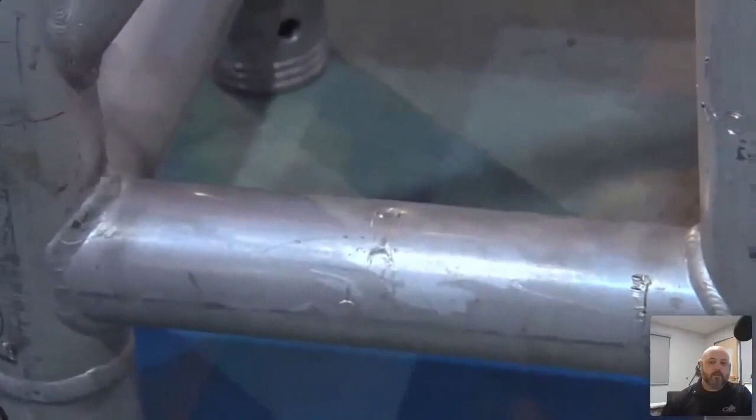And then the last one, I didn't see too many people answer this one, so this one must have been pretty hard. Maybe it's the camera angle, but there's a C-clamp mark that's pretty indented there on the bottom chord. It might be you haven't got the right light on it to make it noticeable, but those were kind of the 3 different indications of what we would need to retire that. Now, Brian, how would you measure something like that?

Well, if you're looking to find out what the tolerance is, like how much of a dent or gouge you can have in a truss, you're not going to find that information in the standards. The standards remain pretty vague, so they don't call out specific manufacturer information. But I would contact the manufacturer of that truss and ask them for those values, like how much material can be worn away, or how deep of a gouge can I allow in there.

And when it comes to some components of the truss, like the ladder bars and maybe the diagonals, some manufacturers actually do make it to where those can be repaired. You send the truss in, they remove it, they put a new one in, and you're good to go. And that's going to be a decision about how much it costs to ship it, get it repaired and all that versus the cost of a new section. But what you don't want to do is continue using truss that you suspect is damaged. Mm-hmm. Very good.

Now, Jesse just joined those trusses together, and we're looking at the bolts there. You got those tightened up. Some of the other things that we should be looking for here are some kind of evidence of inspection, right? Just like our electric chain hoists, the truss has to be inspected on a periodic basis. So Jesse performs his frequent inspection as he's laying it out, putting it together, and we're looking for evidence of a periodic inspection by a responsible party as well to make sure that that truss has been deemed safe to use by a qualified person.

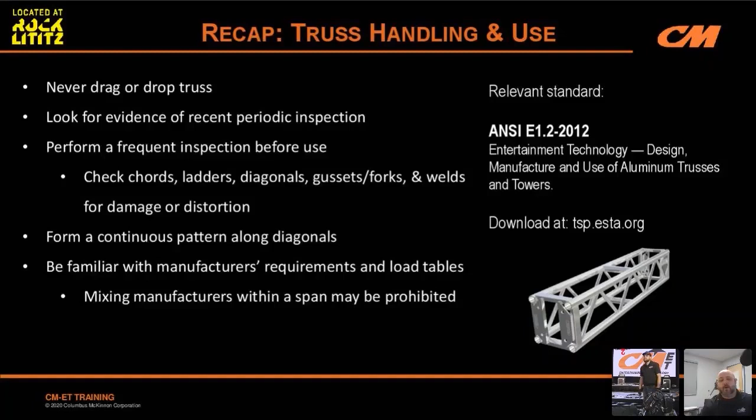Make sure your diagonals form a continuous pattern, and make sure you're also familiar with the manufacturer's requirements and the load tables associated with what you're doing. If you got to mix manufacturers, it's not recommended, and it could be prohibited depending on your employer or the manufacturer. But also realize that you're going to have to use the lesser of any load tables provided for that type of truss.

All right, Nick. So we're going to be getting into the next section here. Yeah, absolutely. So, Mike, if you want to roll the next trivia question, and again, everyone, just go ahead and chime in on the chat board there what we think the right answer is going to be. This is going to be surrounding pre-operational checks of our hoist. So I'll be watching the chat board here, and you guys just start responding when you get the right answer. Brian, if you want to read the question to him while we got time, go ahead.

Which symbol must be embossed on the load chain to verify that it's manufactured by CM and approved for use in the hoist? Now, for our folks that are outside the U.S., they might not see the correct answer on here as it applies to them. So we will talk about that while the question's going. In the EN 818 standard, there are different requirements for the way load chain is manufactured for hoists. And so that certification process is going to be different.

And that hoist will be labeled with an H. It'll be like a cursive, fancy looking H with the number 22. The H signifies that it was certified by BG Prüfzert, a German certification body in Europe. And the 22 is the number that they assigned to Columbus McKinnon. But here in the States, we have a different requirement for our chain, and we've been doing it since 1967.

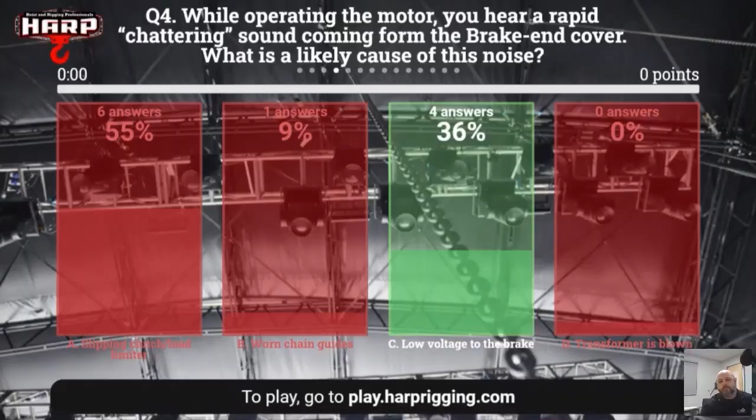Okay, very good. Well, it looks like we're ready to move on to our next phase, which is the pre-operational check of our hoist. Jesse has brought out some of his older hoists that may have a couple of Easter eggs worth of issues for you guys to find. So as Brian is going through with the training portion, if you guys see something that might be wrong, go ahead and call it out, and we'll address it as we see it.

Yeah, before we jump into that, I wanted to talk about a comment I saw come up on the chat. Someone had said motors without gravity switch inverted will chatter also. And the reason I want to bring this up is what that references is the Square D contactor, which is one of the original contactors used in the Lodestar. When the Lodestar was brought from industrial to entertainment, it had this contactor that only allowed you to use the hoist in one direction.

So what I want to tell everybody is that the entertainment standards published by ANSI through ESTA do require that the motor be used motor up and motor down, that you'd be able to use it in either direction. So that would be one of those things I would want to address with any inventory that I have, to make sure that motor complies to those standards if that's your company's policy.

Very good. So our next step is to get Jesse to do this motor pre-operational check. So what are you looking for there, Jesse? What's the first thing that you think you should find? I'm actually looking for any obvious damage to the casing itself, or leakage, dents, anything like that that just stands out. All right. Well, while you're doing that, I'd like for our virtual riggers out there to see if they can find any inconsistencies or red flags that stand out to say, hey, that needs to be fixed or that needs to be looked at.

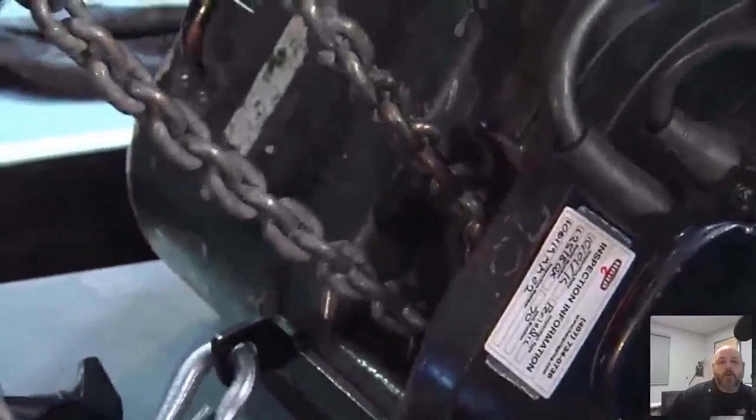Another thing I'd be looking for, Jesse, is to make sure the welds on the chain are facing the right direction. All right, and so for a Lodestar, all the Lodestars, no matter what size they are, if you look along the line of chain, there's a side of each chain that has a weld on it. And those welds need to be facing away from the lift wheel. All right, so away from the dead center of the hoist. When you look at the very center of the hoist and you have the two chains, just go ahead and pull the two chains up so they're parallel. When you look at the center line between those two chains, you want to make sure that the side of the chain links that is facing that center area are the smooth sides of the chains.

All right, they definitely are. Hey Nick, do we have any response from our virtual riggers? Did they find any of the Easter eggs we left for them? Absolutely. I think they found our Easter eggs and a few more. So the one that they found that was pretty prevalent is on the plug. Looks like there might be a loose plug on there, a loose connector. They are correct. Yep.

Yeah, and that's a hint that maybe somebody grabbed that cable to try to move the motor or lift it. And based on the responses we've been getting from our virtual riggers out there, I think that the majority of them know that the cables are not handles. But it does happen from time to time. People do grab onto those. Luckily, this is a quick fix for Jesse. He's going to take off that plug. He's going to take a look at the wiring, make sure nothing got pulled out of its contact. And hopefully he can reseat that cable installation and get it fixed up. Absolutely. So while he's doing that, we'll go over another one.

Looks like a lot of people have said the chain bag hooks need some attention. Can you talk about that? Yep. And I find a lot of people, obviously not the people we have online today, but a lot of people I've worked with don't understand that this is a potential safety hazard for the hoist. We want the hooks on those chain bags to be facing outside. So the nose of the hook, the opening side of the hook, needs to be away from the chain.

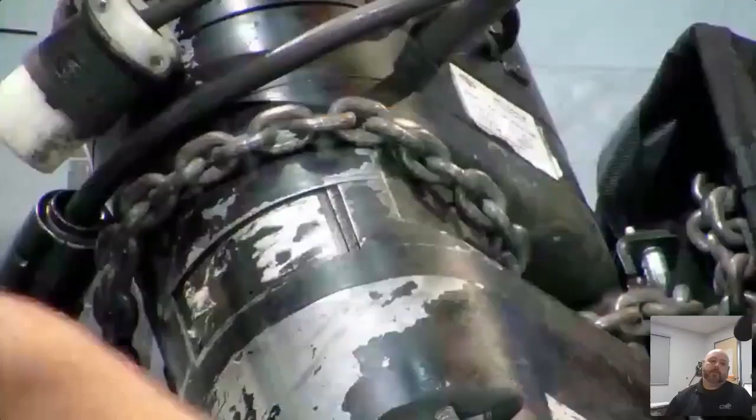So Brian, we got two more. One that's pretty common was they focused on the chain, saying it looked a little rusty, maybe a little dry. If our chain is rusty, how could we possibly remove that rust? Well, if you've got some surface rust on there, that might not be a big deal. You can probably easily remove that. I would start off with a soft medium, like a nylon brush or something like that.

Right. And if that doesn't do it, maybe a wire brush, but be very cautious of it. Don't put the chain up against a wire wheel or anything highly abrasive, because remember, it's case hardened. You don't want to wear away that hardened layer on the outside of the chain. But I think the best way to remove rust from chain that's got rust all over it would be through a tumbler.

And I think the guys at Harp have one of those. Maybe we can take a look at it later. I don't know where it is in your facility, but it's basically a cement mixer without the blade inside. And what we do is we strip the chain of any hardware. We put it in the mixer with walnut shells or various other light abrasive things that aren't going to scratch up the chain. And it does a number on the chain. I mean, it'll take chain like what you're seeing here on screen and make it shiny and new. So it's a fantastic way to clean off chain.

Yeah, very good. If it's pitted, if you've lost actual material of the chain from the rust, that's got to be taken out. The only way to avoid that is to lubricate the chain. You got to lubricate it on a regular basis. And that lubrication, most importantly, needs to be between the links on the chain. Where the metal meets the metal, right?

I see somebody pointed out we're missing our tag. About time. Maybe it was our camera angles that were kind of hiding it. I was surprised not too many people caught that one at first. But now at the nice shot of it, yep, we're missing our ID plate.

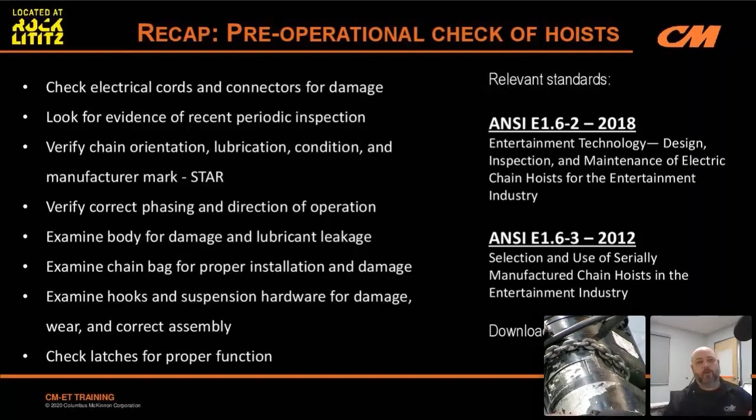So we're going to go over our recap real quick. We'll talk about some of the stuff that we addressed here. The relevant standards for electric chain hoists in the entertainment industry are E1.6-2 as far as inspection and maintenance. And then the selection and use is covered in E1.6-3. So those are your two entertainment standards that you can find on ESTA.org.

And then our pre-operational checklist, kind of a mental checklist that we have to have here, is looking at the electrical cords and connectors for damage. Look for recent evidence of a periodic inspection, right?

A sticker or some kind of label that tells you it was inspected. Look at the chain, make sure that it's lubricated, it's in good condition, and that the manufacturer's mark is there, and also that the welds are facing away from the lift wheel, and that's for Lodestars. For Prostars, different story. Welds face towards the lift wheel on a Prostar.

Verify the right phase and direction of operation. So while I'm reading this through, Jesse, why don't you go ahead and get everything plugged in and make sure that motor runs in each direction as it corresponds to the pickle or controller that you're using.

All right. The reason that's important is when the power phase is reversed on the hoist, when we push up and it moves down instead, what's happening there is the phases have been reversed, but the limit switch inside the hoist is physically still moving. And what that's going to do, if you keep operating it like that for any length of time, you could end up breaking your limit switch right off. In my classroom, in Rock Lititz, we have a handful of broken limit switches and broken travel nuts from the limit switches because of this kind of mistake.

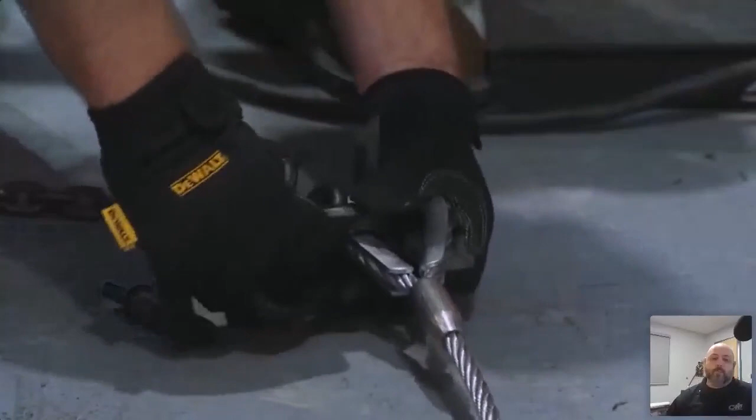And while Jesse's getting that fixed up, I'd like to touch on why it is so critical that the ground rigger is able to keep pace with the uprigger, have a keen awareness of their surroundings, and keep all their operations consistent. The primary job the ground rigger has is maintaining the load hazard zone, the area underneath the work being done above, making sure that no unnecessary personnel are walking through that area, and if they are, that they have proper PPE like hard hats.

They're also there to keep up with the uprigger. The uprigger's got a very important, very difficult job. While it may not be super complex, they need to know what they're expecting to get. Because if I'm up 80 or 100 feet on a beam and I've got to pull all that chain up, that's somewhere in the neighborhood of 120 pounds. And if I pull all that weight up and find out the ground rigger didn't tie the knot right or put the shackle in the wrong place, now I've got to lower it all back down and haul it up again. And I might have a dozen or more points to pull that day. It is not easy work.

So Brian, it looks like our newbie rigger struck a nerve with our virtual riggers with swapping pins. Oh yeah. They don't like that either. No, I can't make these guys happy. See, the problem there, Jesse, is that your working shackle could get caught on the pin there, and that can also get in the way of the uprigger's ability to make those connections. So that shackle needs to be spun 180 degrees.

Fine, guys. Yep. Jesse, how's it feel to play newbie rigger in front of 600 experts?

And also, Jesse, while you're at it, before you make that connection, let's go ahead and turn that eye-to-eye steel around. You see the eye-to-eye steel, the other end of it? Does it have a tag on there? It does. Yeah, so a best practice would be to have that tag where the hook is, so that when the uprigger is going to handle that other piece of steel, they're not having to manipulate that tag, because that tag always ends up getting in the way.

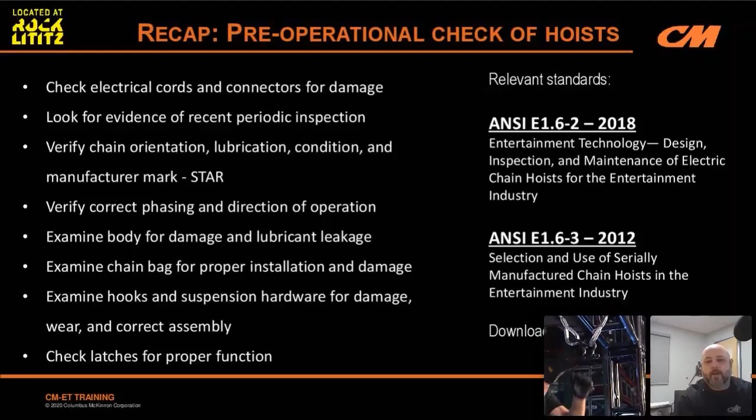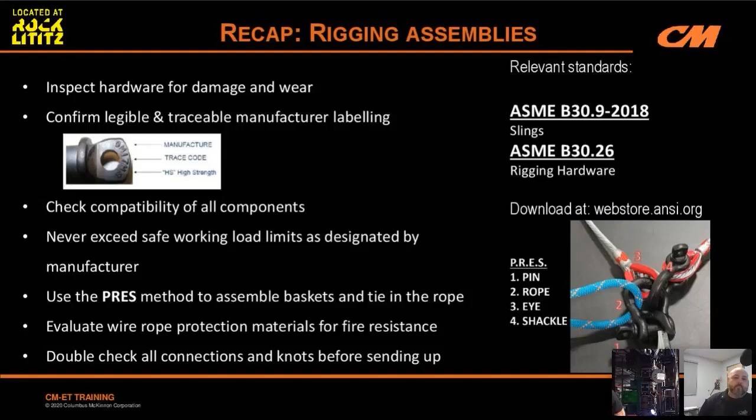Things to keep in mind when we're rigging our points for the top rigger are to inspect all of our hardware. Make sure that there's no damage, no wear. Make sure you understand how to inspect that hardware. And one of those things is to be able to make sure that you can identify the manufacturer. There has to be some kind of permanent fixed labeling on that shackle from the manufacturer, and make sure your pins are matching the body of your shackle.

All right. People do use different manufacturers of shackles, and sometimes the pins and the bodies of the shackles can get mixed up. So if you want to know if your shackle is a proper CM pin, then our manufacturer mark will be on there. It'll say CM. There'll be a trace code, usually a 2-digit or letter code. And then after that, it's going to say HS on it. And HS stands for high strength. That means all of our pins, regardless of the metallurgy of the different shackles we have out there, other than, like, stainless steel, maybe, they're all going to be high strength super alloy pins that are basically interchangeable among CM shackles of the same size.

Check compatibility of your components. We did identify 1/2-inch steel was used with 5/8 shackles. So there's a potential there for the shackles to roll through the eye. So the best practice would be use 3/4-inch shackles or 3/8 steel with 5/8 shackles. Never exceed the safe working load limits as designated by the manufacturer. That is your hard stop. Yeah, we know it takes a lot more to break that object, but you are only allowed to use the working load limit.

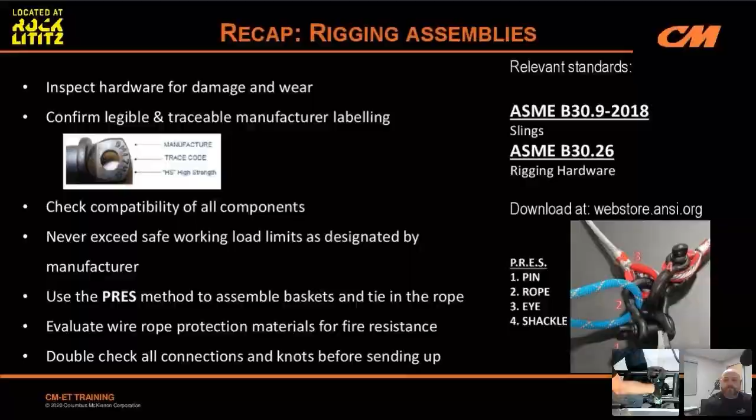All right, we're going to move back to Jesse. He's got some rigging going on there. All right, Jesse, so you're rigging to the truss, and let's see if our virtual riggers can come up with any commentary regarding how you set up your slings.

He's gonna win back your faith. I can see it. And I tell you, let's give him a good opportunity to take a look and find some things, and then we'll go to our trivia. Sure. I think it's good. It'll hold, right? You have Jesse. Jesse's going to win back the love of the team. Yeah, so let's give him a good shot, a good look, and then we'll go to our trivia here. All right. And then we can cut back to it as well.

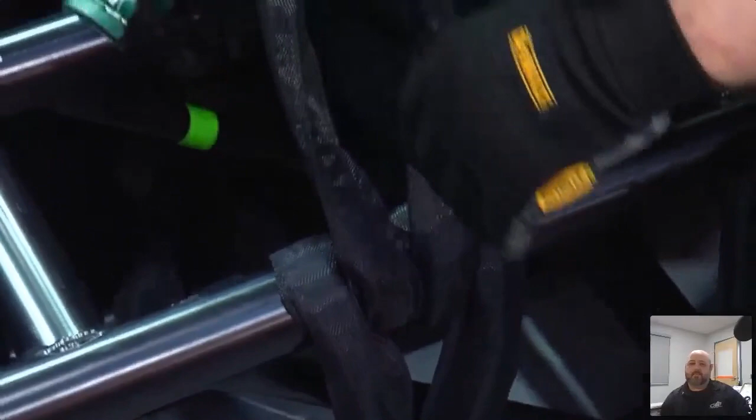Here comes the first question. Which size and configuration of sling would be the most efficient and represent best practices for rigging points on a 12x12 truss? And yeah, we realize that some of these options, while feasible, might not be the best practice here. Yeah. So go ahead and shout out the answer when you see it, guys. And Brian, let's talk about how many different kinds of slings are there? I know there's 3 and 6 that are pretty common, but how many different types are there?

Yeah, well, when it comes to synthetic slings, you could have flat webbing slings or round slings like we use. But the 3 types of connections that you'll typically see on them are going to be an eye-to-eye sling, similar to that steel that we use, but in a synthetic form. A reverse eye that's meant to be choked or girth hitched around an object. But what we typically use are called EN slings or endless slings, where it's just a complete circle, and that's the most common.

Okay, so it looks like we're flooding in with our answers here. And it looks like B is the prevalent one, but we did have quite a few for C, so maybe we can explain the differences there. Yeah. Each of these answers, yes, you could perform the function that you're trying to do with each of these. The 3-foot sling basketed to the top chords, that is not the best way to go here, because one, you don't have the redundancy of using 2 separate slings, which is a good practice to have. But also that simple basket going through the chords, if the truss is off balance at all, it's going to roll forward and backward, and it could slide left to right as well, depending on how the loads are balanced and such.

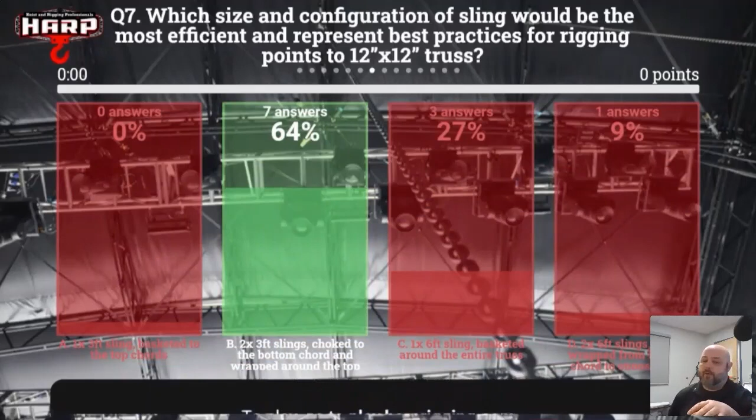The right answer was 2 3-foot slings choked to the bottom, wrapped around the top. That is the go-to method for this kind of application. If you took one 6-foot sling and went around the entire truss in a basket, what you're going to achieve there is like the maximum strength of the basket and maximum strength of the truss because you're capturing all the chords. But what you sacrifice there is you open yourself up to some hazards.

So first of all, the truss can slide through that sling. So if it's on the end of a truss, you might lose that point entirely. Second, if that point slacks off compared to others, and that's normal to happen when you raise a multi-hoist rig, the bottom portion of that basket could end up caught on like a C-clamp or some other object on the truss and end up getting cut, torn, or maybe even dislodging that object.

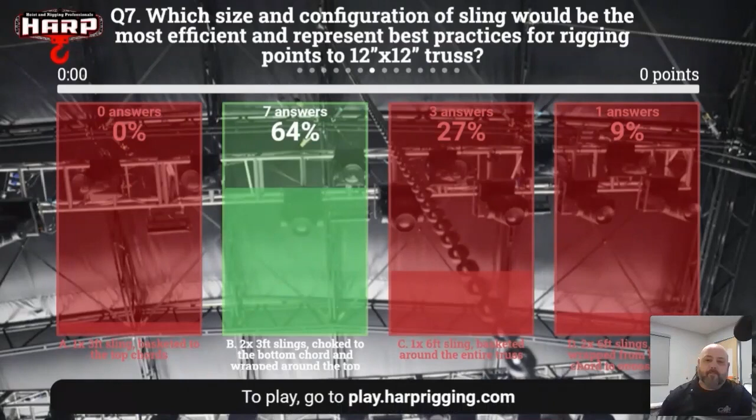So what we want to do is keep those slings nice and tight, secured to the truss with some grip on them. Very good. All right, so let's move on to the next trivia then. So when you're rigging points to the truss using synthetic slings, what else is required to make the point safe and ready for lifting? Okay, very good.

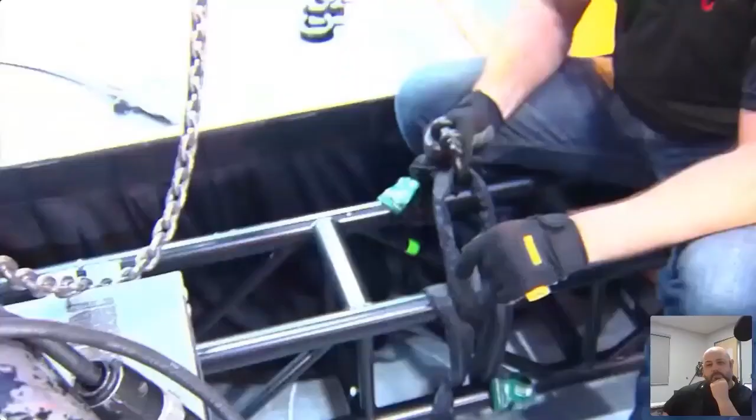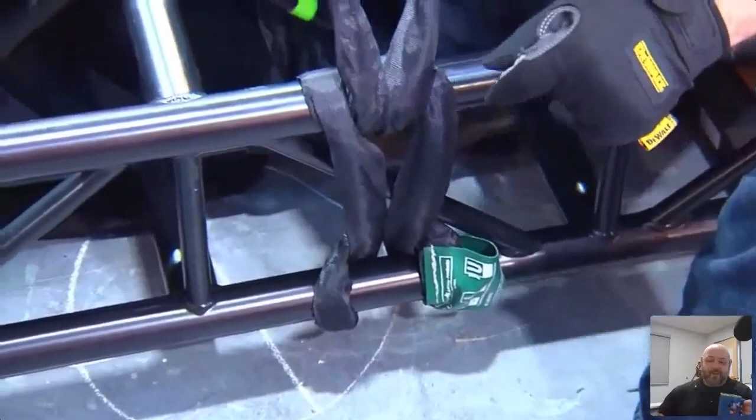All right. So let's take a look at his wrap. Our virtual riggers found some things, Brian. Yeah, what did we find? Our virtual riggers found that there's something wrong with the tag laying against the truss itself. I put the tags out so you guys can see it. That's not a good thing? Not good practice? Well, I can see it. Yeah, good intentions. But the reason

that we don't want that tag involved in that kind of contact there is because it has nothing to do with whether or not the sling is weaker or stronger or anything in that area. It has everything to do with we have to preserve that tag as best as possible, because once that tag has become illegible, that sling is now garbage. So we want to keep the tag in a place that it doesn't have any kind of stressful contact with the other parts of the rigging.

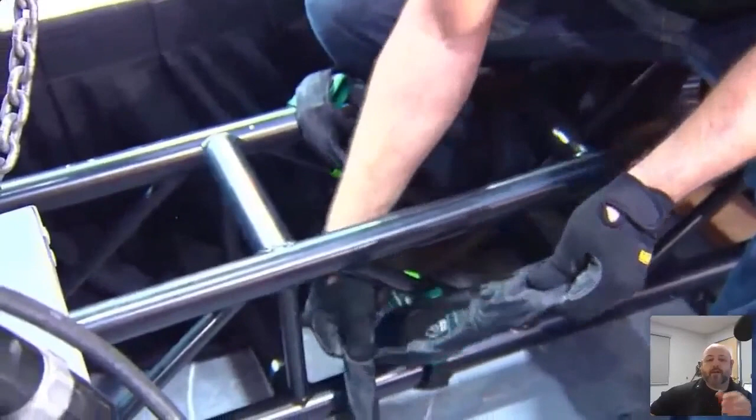And then the other thing that Jesse had done there, you can see that his bottom choke on that side was on the interior of the truss, and then he took the sling up and wrapped it around the outside. And while that's not some huge safety issue, we want everything to be consistent. It will alter the overall length of his sling. So it's going to kind of cheat his sling a little short on that side, which could imbalance the truss. And it could press up against a diagonal and cause a bend in one of your diagonals.

So if you're going to wrap around the outside, like he has now, make sure the collar of your choke... Can we take a look at the bottom of one of your slings there? Yeah. Let's take a look and identify what the collar is. So that's what I'm calling the collar of the choke. You want that to be on the same side as the direction of your wraps around the truss. So, Jesse, let's take a look at the top of your truss and see how you wrapped those top chords.

Fired. That brings up a whole new question. What happens when you drop a shackle? You're fired. I don't know if we want to open up that bag of worms or not.

So you've done two different styles of wrap here. On your left, or the downstage side, you've got what I call a through wrap. So you took the end of the sling through the two sides of itself. And on your upstage side, your right-hand side, it looks like you did what I call a sidewinder wrap, where you wrapped outside the sling ends and kind of moved your center of gravity a little bit.

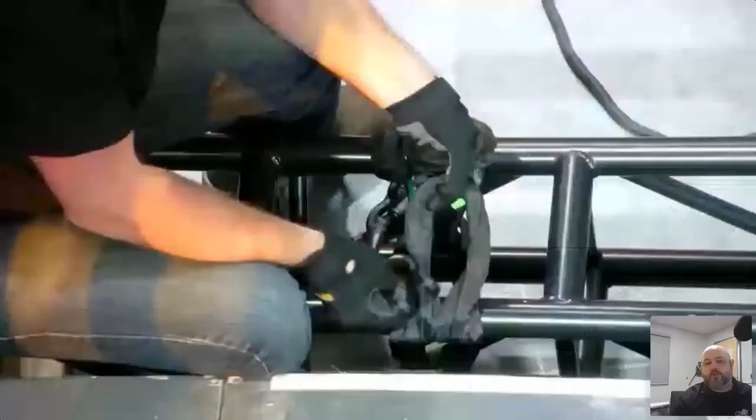Either one of these is actually just fine. And we do use them in different applications. Some people might argue that a through wrap causes too much friction between the sides of the sling. Other people might argue that the sidewinder wrap changes your center of gravity on what part of the truss is taking load. Either one of them is just fine, but what we do want to have is consistency.

So I find that the sidewinder wrap can be a good technique when you need to cheat the point over a little bit along the truss to line things up properly. But this is what I typically go with, which is a choke on the bottom, collar on the outside, one wrap around the outside. All right, and we're using 3-foots here because they mate best with a 12-inch truss when we need the headroom and stuff like that.

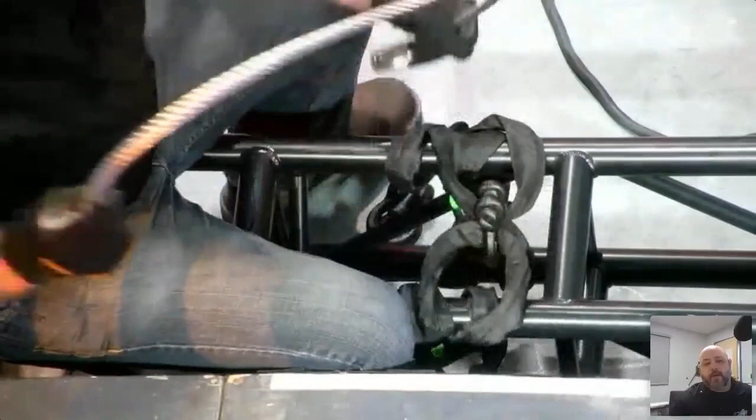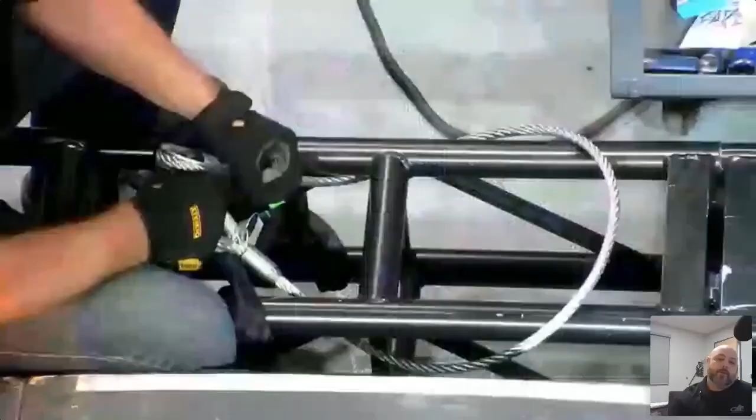And Jesse's going to imagine we are using a steel core synthetic sling in this case, but we're going to pretend for a moment that it's just a polyester round sling. And we're going to show you one of the go-to ways of adding a piece of steel into that rigging setup. You see that Jesse kind of basketed over the top and then brought the two ends up through the inside of the truss.

And the reason for that was he's trying to take up some of the potential slack that steel would have should the slings fail in a fire situation or damage situation. Then we want to minimize the amount of drop distance, of free fall distance that truss is going to experience before that eye-to-eye steel catches it, right? And that precaution is there to buy us just a little bit more time to vacate the building or for first responders to get to a safe area, that kind of thing.

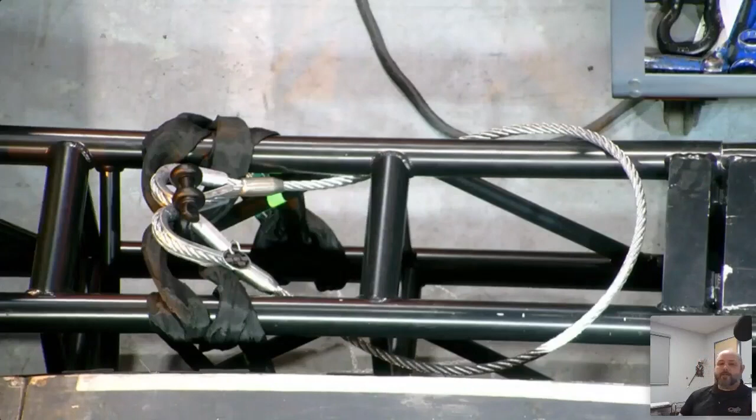So it looks like you got your point all rigged up. You got some great feedback from our virtual riggers. And I would like to pick someone's brain today because we did talk about the differences between polyester round slings and steel core slings. So I'd like to bring in our good friend Rob Bruno, my counterpart here in CM.

Hey, Rob, how you doing today? Pretty good, Brian. Yourself? Pretty good, man.

We've talked a lot about this subject in our rigger boot camps that we do here at Rock Lititz. Up until lockdown, we were doing those once a month, along with some hoist boot camps that were a lot of fun. But I know this conversation came up quite often regarding the steel core synthetic sling issue. And I think Jesse found a couple slings in his inventory that he was going to use today that he's not too sure if they're safe for use. So maybe you guys could run through that and talk to us about that inspection.

Absolutely. So yeah, Rob, I found this sling. I inspected the sling. Everything looks fine. There's no tears or anything. It's actually a steel core. Feels good, but unfortunately, I can't read the tag at all. Like, it is not legible.

Yep. So when we're looking at slings, we're going to follow an OSHA regulation, which is 1910.184, which covers slings, as well as an ASME standard, which is ASME B30.9. They both state that the sling tag must be present and legible. So even though the tag's there, if you can't read it, it's no good. So you have to remove that sling from service and cannot use it for a rigging application.

Okay, copy that. All right, I have a couple other ones. I can read the tag perfectly fine. They look somewhat new, actually. But unfortunately, I don't think they're good. But you're the expert.

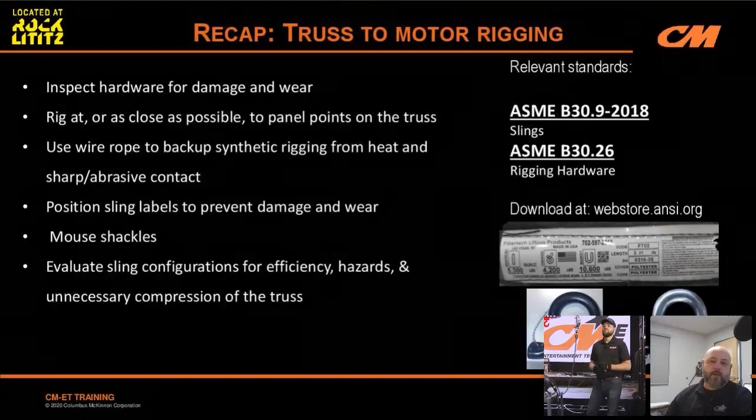We're going to the recap of this step real quick. And as Rob mentioned, there's some ASME standards that relate to this, same ones we talked about for the hardware we used before. And on the bottom right of the screen, someone had asked, what is mousing? And here's some visual examples of it right there. The black shackle you're seeing, we're using 0.032 inch stainless steel safety wire and a special tool called a mousing plier, which isn't required, but it is a very convenient way to mouse shackles.

And then on the right side, that silver shackle, that one's been moused with a tie wrap. So, not considering the company policies that you might be working under at a venue or with a company, these two methods are typically used. The tie wrap method is typical of a temporary install, and the wire method is typical of a permanent install. But we do make shackles that have a bolt, nut, and cotter pin in them, and those are designed specifically for permanent install use.

Whether or not you mouse the shackle is still debatable, but I will say my personal preference in my professional rigging experience has been that the points to the truss should definitely be moused. And the reason I say this is because you might have a truss that has several different hoists on it. As that goes into the air, the loads are going to shift between those different hoists, right? The heaviest hoist will run slowest. Other hoists might be seeing very little to no load at a given time.

And during those no load or light load situations, that's when that shackle pin is subject to and vulnerable to rollout, to where the pin can unscrew itself. And that could be acted upon by things like heavy bass music, maybe while the audio team is running noise through a lot of the speakers and stuff, or cables that are being pulled around and moved.

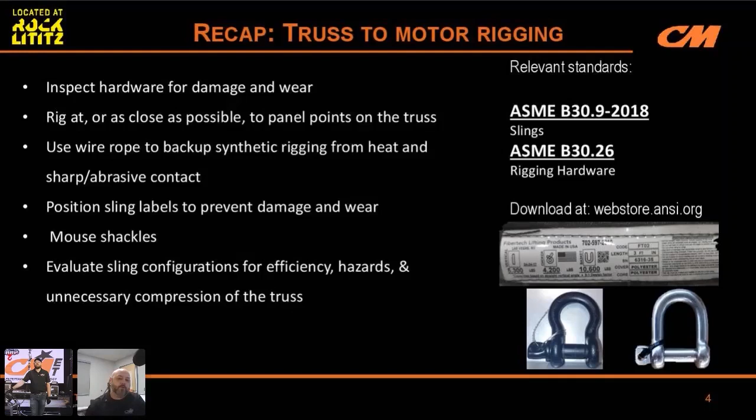That's something that happens a lot in ballroom situations or areas with low headroom. We try to really get the angle of those slings as flat as possible. You have to realize that when you do that, you're going to be putting a lot of compression on the truss chords and could end up bowing the truss. I've retired dozens of sticks of 12 and 20 inch truss because of compression from slings pulling them inwards like that. So that's something that you want to be very cautious of as well. All right. So that's our recap.

Nick, why don't you set us up for our next trivia section here? Absolutely. So the next step we're going to be doing is just flying our truss to working height. So these questions are going to kind of somewhat surround flying our truss. So Mike, why don't you go ahead and roll the first trivia question, please?

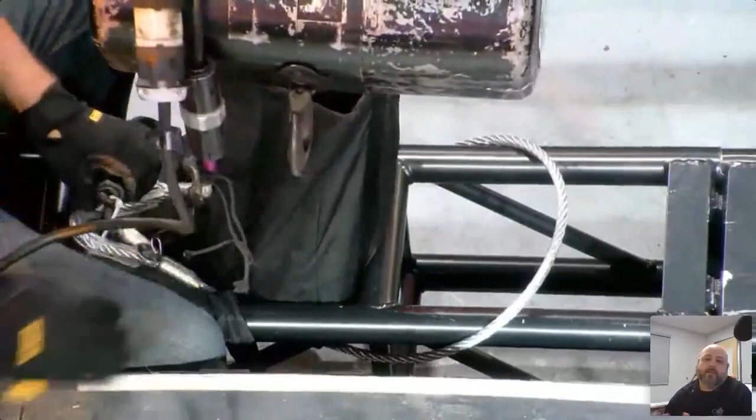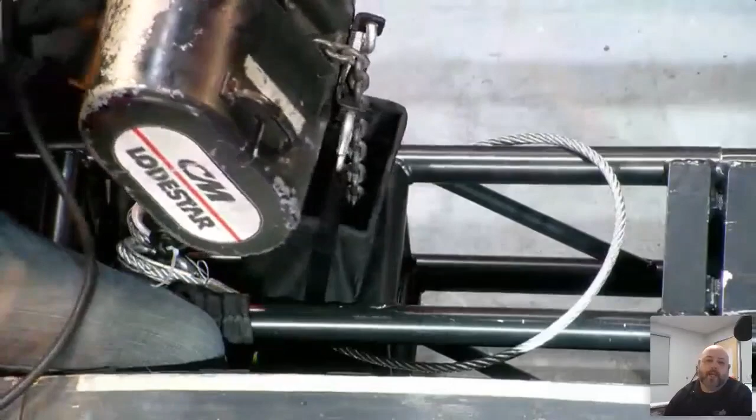All right, so we got our motor up in the air, and we're going to get it down there and hooked onto our truss there, our rigging point. Someone did ask about the 4 different objects inside that shackle. Ideally, we do want to minimize how much stuff we have in a shackle. In this case, this is considered acceptable practice because the eye-to-eye steel pieces aren't taking any load. So what's important there is that they are on top of the slings, not under the slings, so that the slings don't get damaged when load is taken.

So Brian, we've had a couple questions on dressing cables on the truss. Do you mind maybe running through a couple tips for dressing cables? Sure. You got to talk with the other leads and the rest of the crews that are working, because they might have special requests or special needs. They want the audio cables and the video cables run on separate sides. Before you start running cables and commit to that process, there might be a curtain or some other kind of object that needs to go there instead.

So you got to make sure that everyone understands what piece of the truss they get when they're running their cables, especially in a situation where you got to troubleshoot the signal or power issues. You don't want to have to be digging through loads of cable to try to find your connectors and stuff. Yeah. Thank you. All right. Looks like we got us all rigged up there.

Jesse, have you checked our motors from the multi-hoist control system that you've got yet, or are you just running from the pickle? Just the pickle for right now, but I'm actually switching over as we speak. All right. So in this situation, Jesse's got a 7-pin cable that runs power and control for his multi-hoist system, but he's got that spare pickle cord sitting out there too. And one of the things that you could encounter is maybe your hoist runs up and down just fine when you're running off the pickle, but there could be a problem with that 7-pin connector, and maybe it's not talking to the hoist control system. So that's something that you should be watching out for as well. Make sure it operates from the primary system.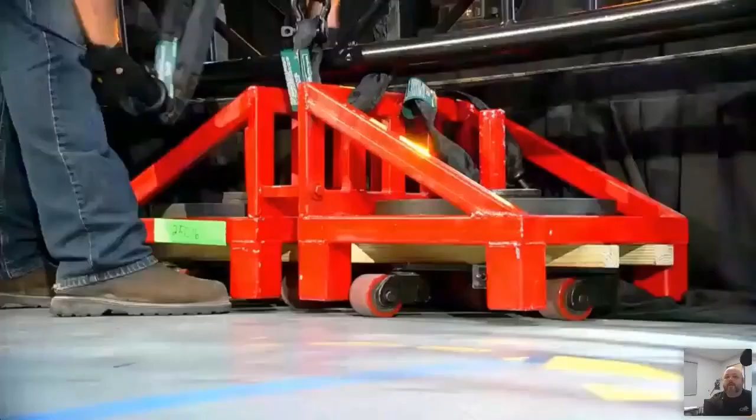While Jesse's getting that rigged up, we're going to go through some rigging math. And this is kind of the first basic formula that we address in our rigging math portion of our rigger boot camps. This is how to calculate the load of a point load on a simple span. So we have a determinate structure, meaning it's a straight truss on 2 points. We have a point load, and then we'll sketch out everything in terms of what we need to know. So things that we need to know are the span. That's going to be the distance between your 2 supports, the 2 motors.

We need to know the distance between the first point, A1, and the load or object that we're hanging, and that's going to be D1. And then the distance between that object and the far anchor, which is going to be D2. We also have to know the weight of the object we're hanging. So how much of a load are we putting on there? And then what we're going to do is plug those numbers into these 2 formulas to determine how much of that object's load is going to be applied to each side.

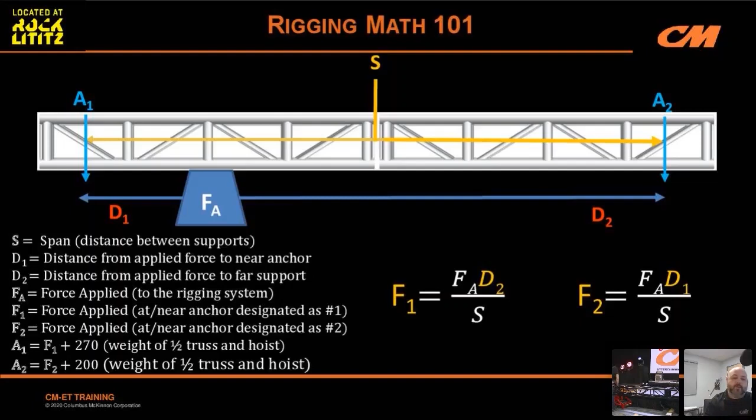Now we've separated F1, which is the force on the anchor from the object, and the value for A1 and A2, because what A1 and A2 represent is the cumulative load. So we want to figure out how much of that object's load is going on the anchor, and we also have to account for the weight of the truss and the weight of the hoist, etc. So the way that we set all this up, if we want to find out our span and our D1 and D2, that's just as simple as running a tape measure and measuring those distances.

If we want to find out the weight of the object, well, we shouldn't be hanging anything that we don't know the weight of. So use your internet connectivity or product manual and find out the actual weight of the object that you're going to be hanging. And then the self weight of the truss and the hoist in this scenario, we can just look at the self weight of the truss and apply half of it to each anchor. And then the motors themselves as well. We can find their weights and account for those.

So we're going to start off with a starting weight on A1 of 270 pounds because that accounts for the truss and the motor, and then 200 pounds starting weight on A2. And then our distances are, the span's going to be 11, the D1 is 3, the D2 is 8 feet, and then our force applied is 250 pounds. So the object we're hanging is 250. Then all we have to do is plug those numbers in to this formula. So it'll look like this when you first start, 250 times 8, finish that part and then divide it by 11.

So that'll look like 2,000 divided by 11. And when we finish that part of the formula, we're going to get 181.8. So that is how much of the 250-pound load is being applied to anchor number 1. And then when we go back to our stage setup later, anchor number 1 is our stage right side. So just for point of reference.

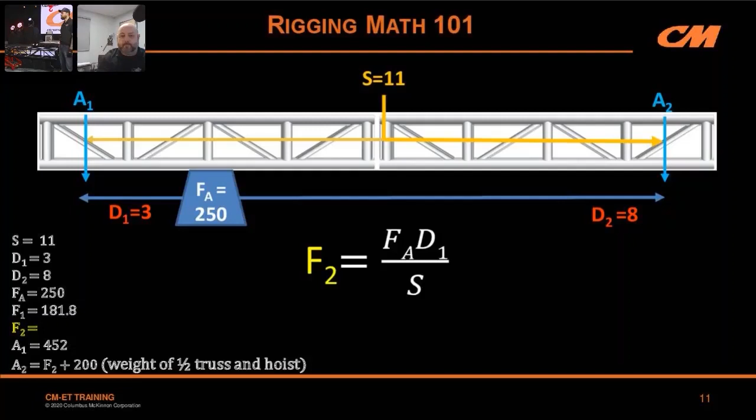Keep in mind, anything with an F represents a force. Anything with a D represents a distance. And the letter S will always represent your span. All right, we'll plug the numbers in. 250 times 3, divide that by 11. That's 750 divided by 11. And then when we solve for that, we get 68.2.

Now, to verify that you've done everything correctly, all you have to do is add the results for F1 and F2 together. And if they equal FA, then you know that you did all the calculations right. So then we'll add our F2 value to the existing load on anchor number 2. And we should be seeing something in the neighborhood of 268.2, give or take the accuracy of the load cell.

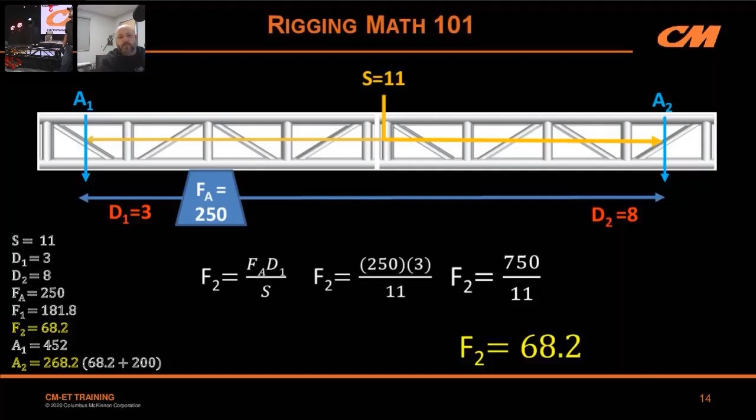Before we move back over to the stage, I do want to present an idea for everybody to understand. If you have several objects that all have a similar weight to each other, and they're grouped together and spaced rather evenly apart, which is pretty common for us, you don't need to run the formula for each individual object. You can take that group of objects and find the center of gravity.

So find out where the objects start on the truss and where they end on the truss, and find the center of that. Use that to measure out your D1 and your D2 values, and then take the cumulative weight of all those objects. So if they're all 200 pounds each, your FA value is going to be 600 for the formula. And that's a quick and easy way to account for a group of objects that are a point load on the truss.

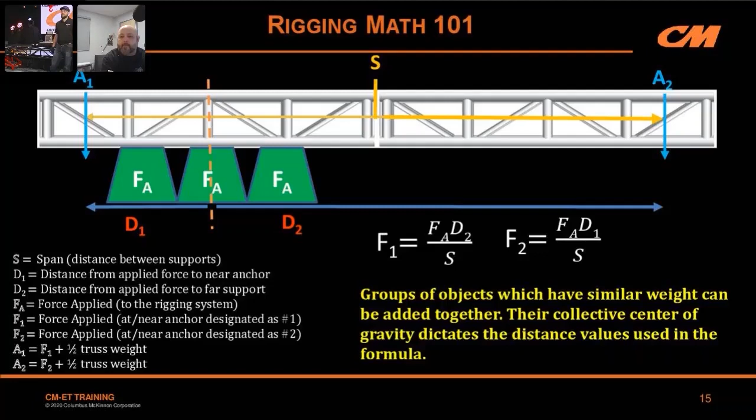All right, so now that we've talked about that, we're going to go ahead and get back to the stage. Jesse's going to lift our weight, and we'll take a look at the dynamometers. So, Jesse. All right, so we're all rigged up here with some weights. Grab my controller here.

Yeah, and as he's getting ready to do that, notice how the motors are leaning, how they're tilted. The reason for that is the weight of the chain in the bag is overcoming the balance of the motor. So that's perfectly normal, and we can use that as a way to visually check our motors to make sure that they're actually taking some load. So let's go ahead and fly it out, Jesse. All right, truss flying.

All right, so we're off the ground. We are off the ground. I don't think we're perfectly level, but I don't know if that matters. Does that matter in your world for weight? Not for the purposes of our load estimation. When we tilt the truss, we're not going to see any significant transfer of load until we start to get past 30 degrees and into the 45-degree zone of angle. You know, a little bit out of level is not going to change much.

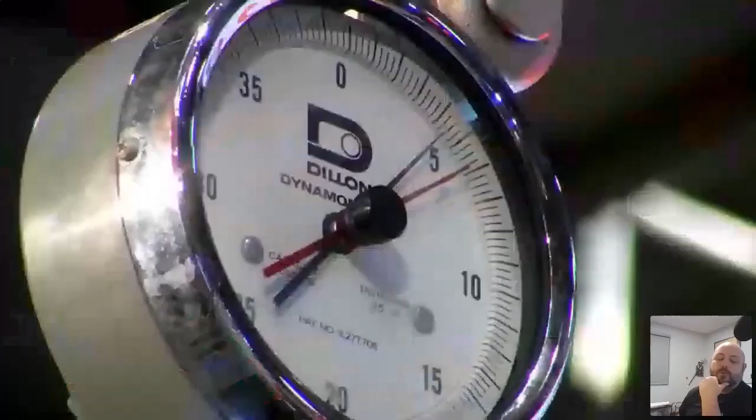Now, having the truss level in general is a good practice, you know, for working on the truss and for having it level for lighting focus and things like that. So let's take a look at our A1, which is going to be our stage right side, the side that's closest to the load. So it looks like we've got somewhere in the neighborhood of 450 on there.

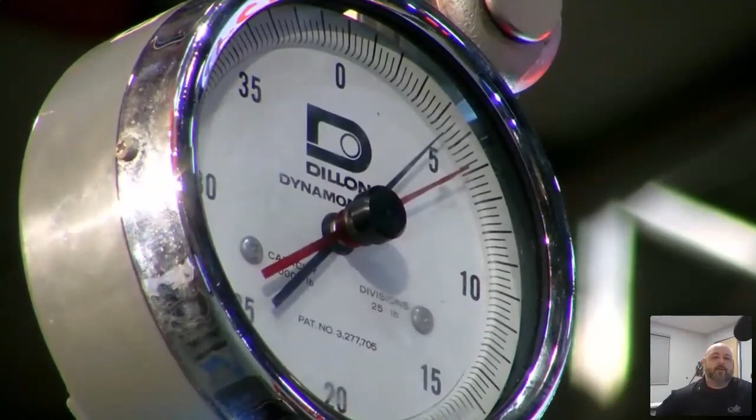Now, we are using some old school analog load sensing devices, dynamometers. Dynamometers don't just measure load, they also measure the dynamic force. So if you look at that red needle, that tells us the maximum amount of force that that point experienced while he was lifting. So remember, in dynamic situations, when you're moving an object, you are going to experience higher loads than the physical mass of the object.

And as long as you're operating within the safe working load of your hardware and the rated capacity of the hoist, those dynamic loads have already been accounted for in the design factors of what we build and what we use. But it is good to know that we do have an increase of load while we're moving. So that's something that we should keep in mind. So it looks like we got about 450 on that side. Let's take a look at the other side and see what we got there.

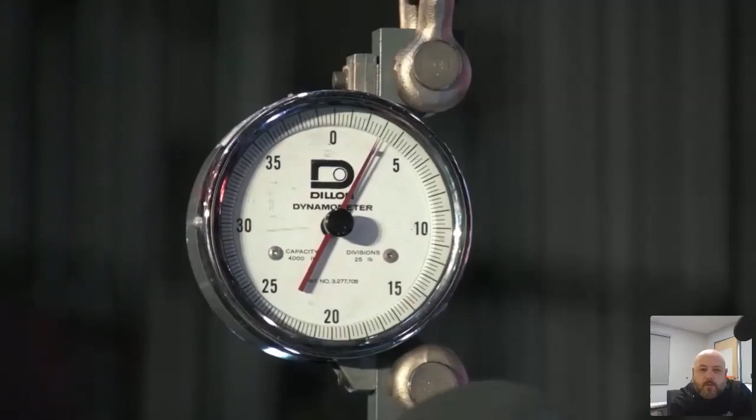Looks like it's... I don't know if you can read that too well on your side, but I want to say that's 275. On the stage left side? Yeah, that looks like 275 to me. Yeah, probably pushing 290 even. But awesome. I could be off. I am getting old.

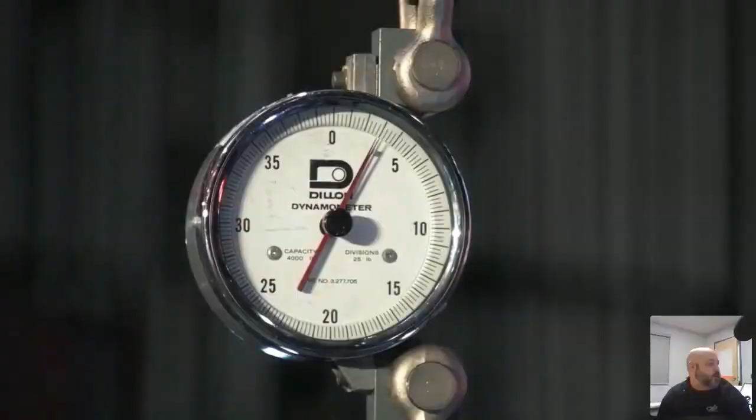So when we did our load estimations, it looks like our formula came out with a value of 268.2 for that side and 452 for the other. So we're pretty close to where that formula says we should be. And I want to stress to everybody that when we do these formulas and things like that, it's an estimation. We can't call it a calculation, because as we raise that truss up, things are going to change.

And additionally, any load sensing devices we use, even if they're electronic ones, still only have to meet a plus or minus 2% of accuracy. And that accuracy is not based on the live load that you're applying. It's based on their total capacity. So it's a good choice to select your load sensing devices to have a range that's closer to the actual loads that you'll be working with, so that your accuracy is more close to reality. And also to account for the fact that it could have plus or minus several hundred pounds depending on the accuracy of that device.

So there we go. We've gotten our truss in the air, so to speak, and we've gotten a load on it. We did some estimations and all that. So Nick, what do we have next to talk about? I think that about wraps it up.

Is that a Mountain Productions bag I'm seeing on one of those hoists there? Yeah, we got a little bit mismatched bags and parts. I mean, being a bigger rigging company, you get a little bit of everybody's stuff over the years. Absolutely. Well, Mountain Productions is another good partner of ours, so they're one of our good distributors as well.

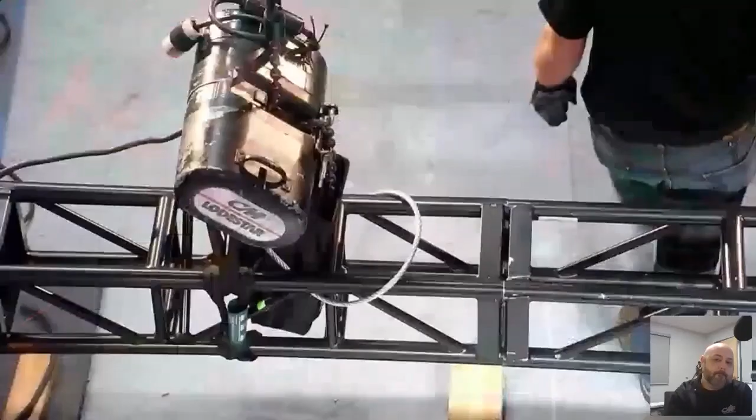What's that? The question was, why did we put the chain bag inside of the truss and not outside of the truss? Oh, yeah, that's a good point. And that comes down to what you're trying to do there, which is place the chain bag in such a way that the chain will drop into it nice and freely without obstruction. So if you put the chain bag on the outside of the truss, it might still work just fine. It all depends. I mean, if it was 20.5-inch truss, it wouldn't.

But what we don't want to have happen is for the bag to deviate away from the hoist to where the chain could spill out. Because once you get a couple feet of chain spill out, you're going to lose the whole thing. And that could cause an accident, could cause some injury. So that would be why we made that choice in this particular instance.

Someone else asked if there is a difference between using a sling versus a hardware solution like a truss pick, and whether or not you have to back that up. Truss picks are awesome. They do tend to run a bit more expensive. Most of them are solid plates of aluminum, which can be pretty pricey. As far as backing them up goes, that I can't speak to because we don't manufacture those. So talk to the manufacturer of it.

But if you look at the reason we're backing up the slings in this instance, we are pretending for a moment that they're synthetic, not steel core slings. We're backing them up for fire and cuts, tears, abrasions, right? So if you're using a pick, you don't need to back anything up for that purpose.